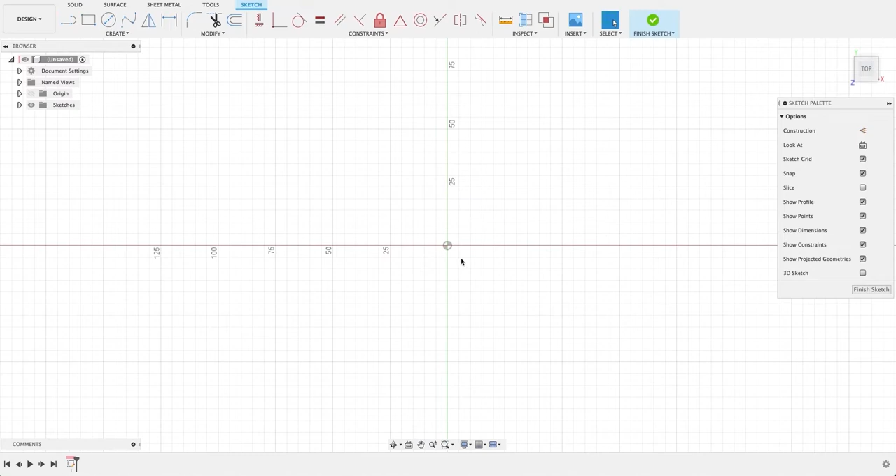To start, we're going to go to create sketch. We're going to click on our ground plane to rotate this around and start a sketch here. We're going to start with a center rectangle. We're going to go to create rectangle, center rectangle, and work around the origin points.

We're going to click in the middle there, drag out, and then type in our measurements of 123 high by 204 wide.

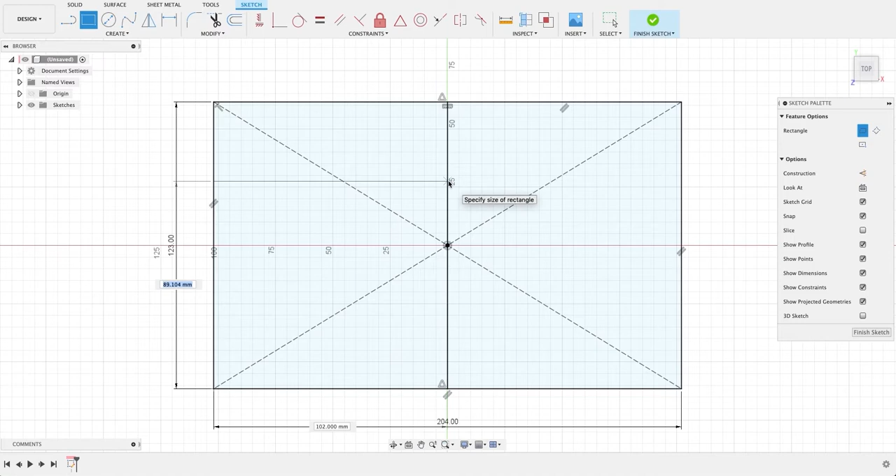And then we're going to do some more lines and rectangles to split this up. So we'll use our line tool, and lock this into the center of this top line. We get the little triangle so we know it's there, and draw down to the center point again. Then go to our 2-point rectangle, start in this bottom corner and draw up, lining it up with this edge here, and type in a measurement of 102 on the height. So this gives us our two sections.

So we're going to finish our sketch, go to extrude. Select this point and bring this up by 12.

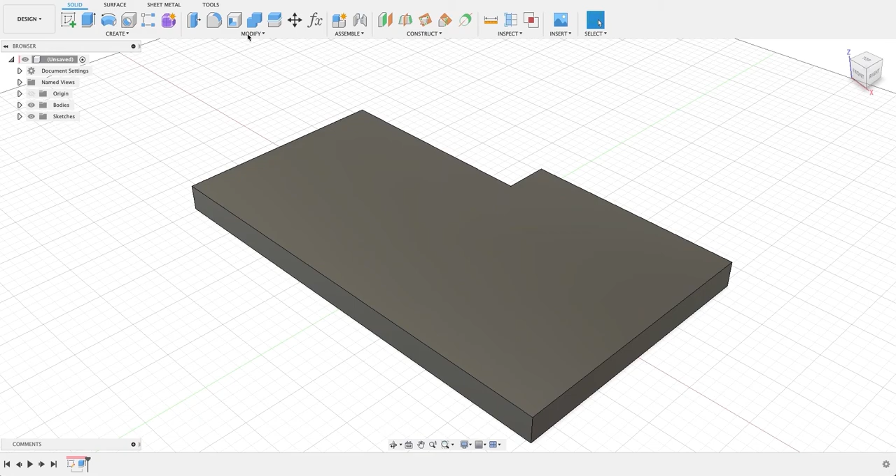And we're going to create a new sketch on top of here to start the sections. We're going to project in the geometry so we can use that. So press P on our keyboard, select this, and press OK so it brings in our geometry. And we're going to use our line tool just to split this down the middle again.

So we've got our two sections. Whilst we're in our line tool, we're going to turn on constructions, and do a construction line from this point to this point, and this point to this point—these are just here for us to reference. So we're going to turn off our construction.

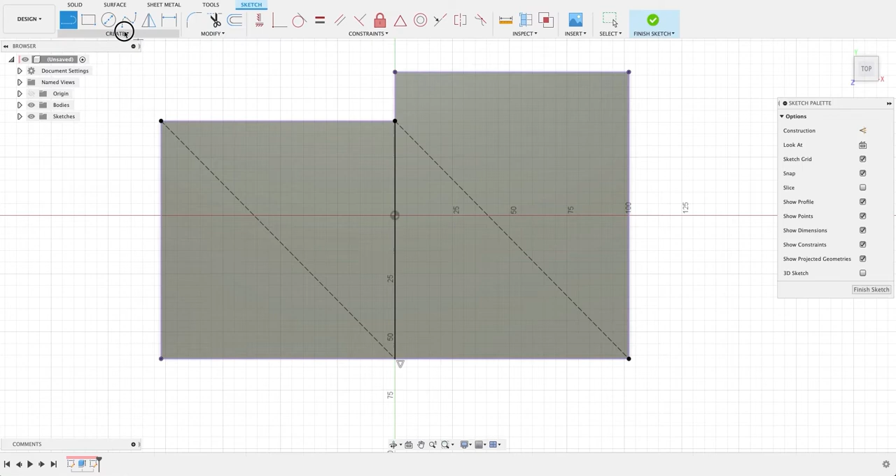From here we're going to put in our two boxes, one for the planter and one for the post-it notes. We're going to go to a center rectangle again, line it up with our center point here, click and move out, and here we're going to do 82 by 82. We'll do the same over here, on our center point, click and draw out, and do 84 by 84 just to give it a little extra space.

From here we now need to put in our holes for our pens. We're going to use our line tool, turn on a construction line, and go from this point up to our top here so we can work from that.

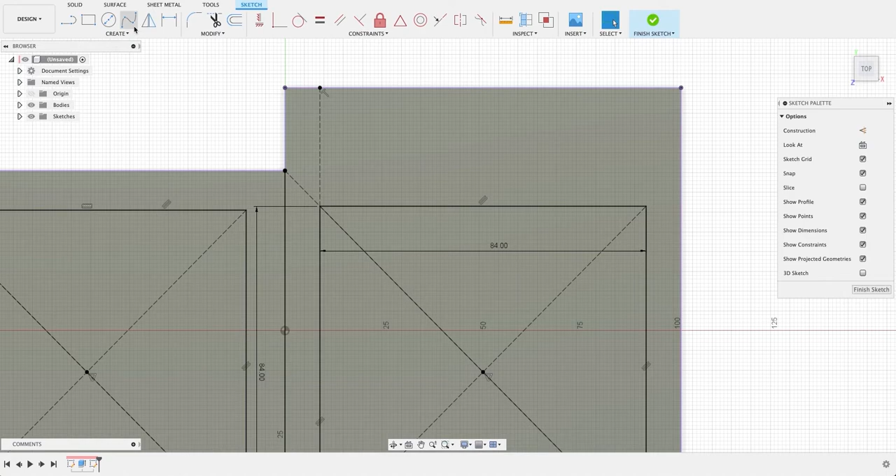We're going to turn off our constructions now, go to create circle, 2-point circle, find our center point here, click and draw out, and do this by 11mm—a good size for a pen to fit in.

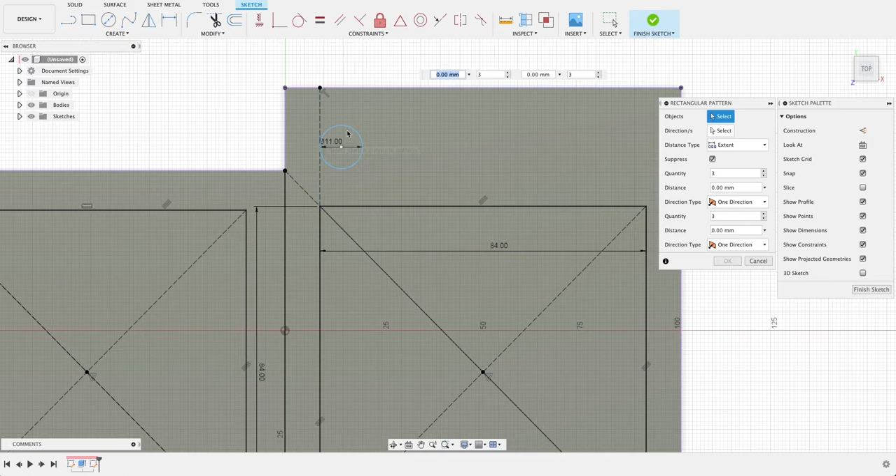So we're going to pattern this along so we can have 4 of these. We go to create, down to pattern, rectangular pattern. Select this line, grab this arrow and drag this out. We know our overall length is 84, so we can do minus 84, which is one pen hole too far, so we just want to add 11 to step that back in, and then press a quantity of 4.

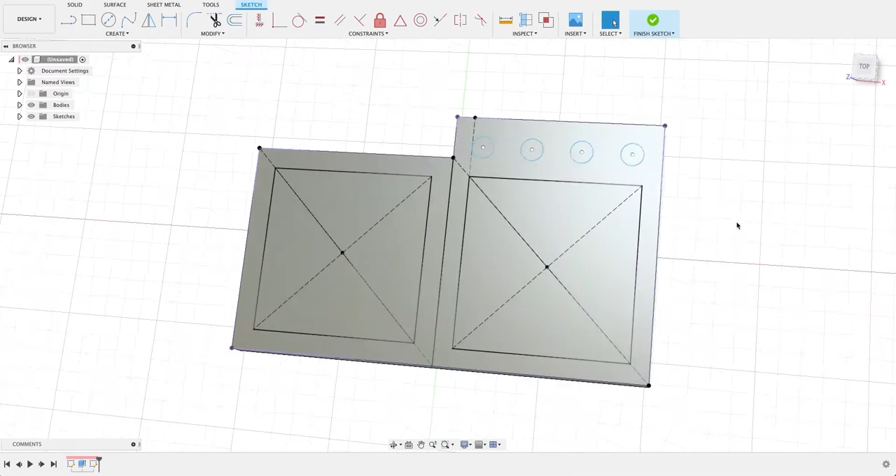Perfect. So from here, all we're going to do is finish our sketch, and extrude this down so we can have our planter sit into here. I'm going to select this and we'll do -6.

Now we're going to turn our sketch back on because I'll turn it off as it's the first time it's used. We're going to extrude this up by 12, and change the operation from join to new body. And we can turn this sketch off.

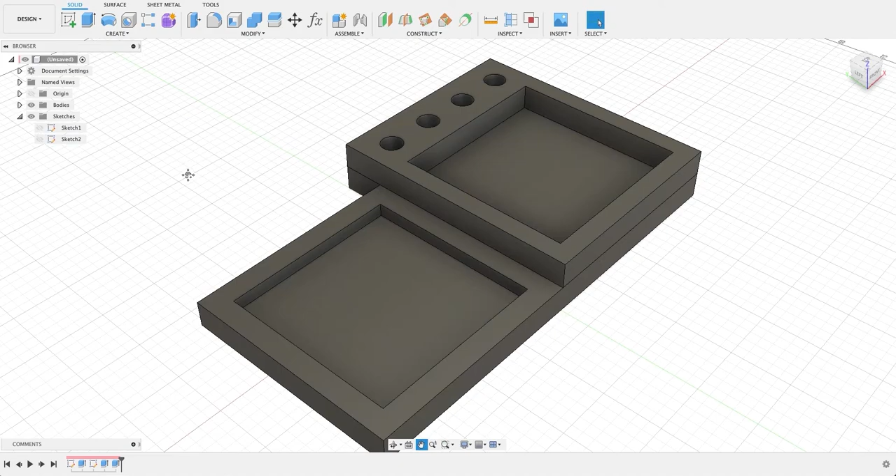We're going to bring this up again, extrude from here and bring this up to 12, and change this from join to a new body.

Okay, so all we need to do now is just go around and fillet our edges. We're going to go to fillet in modify, and we're just going to select all of our exterior edges and our internal edges as well.

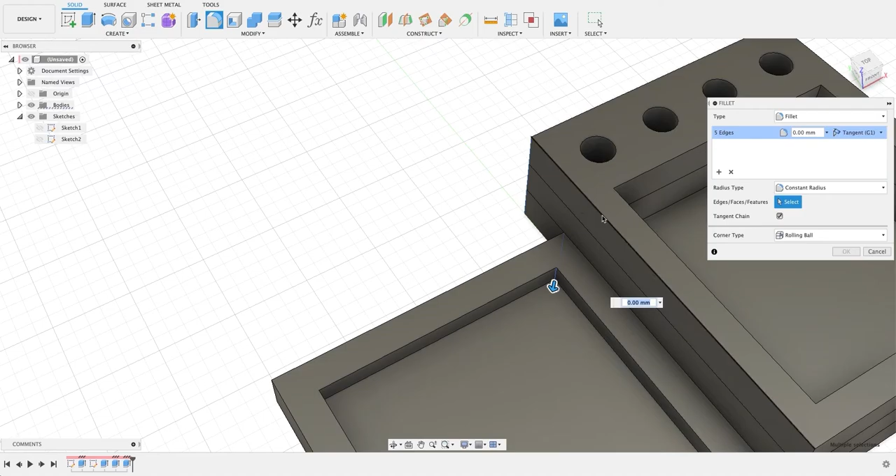Perfect, so we're going to do this by 10. Before we press OK, I just want to run around and make sure we haven't missed anything. Perfect, okay. So once this is done, we're going to quickly make our planter sit in here.

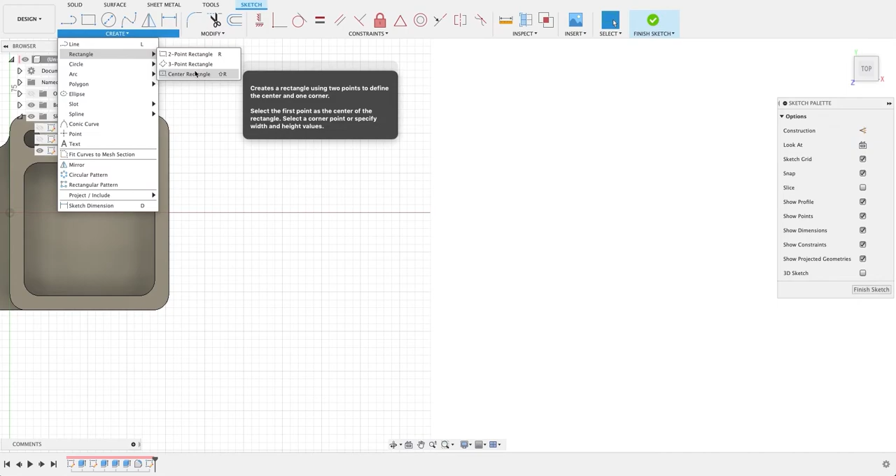We're going to make this over here, and then we'll line them up together. To do that, we're going to go to create sketch, make sure we're sketching on our ground plane, move it over there, and go to create rectangle, center rectangle. This is going to be 70 by 70, and we're going to extrude that up by 75.

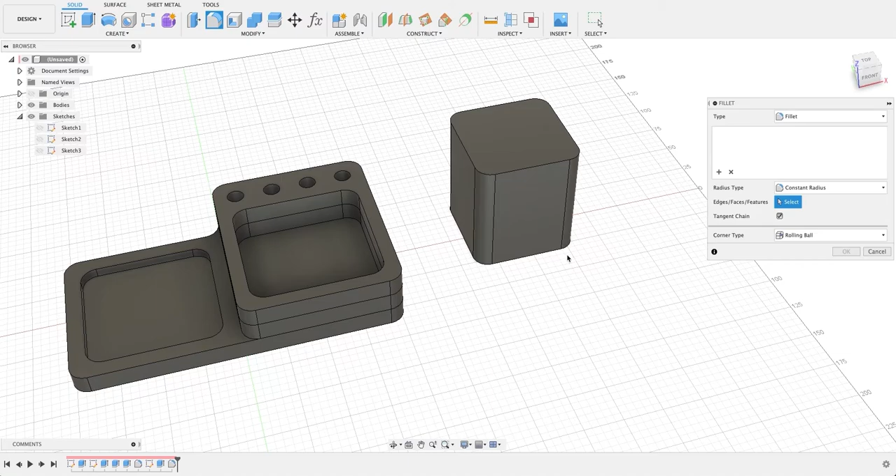I'm just going to fillet these outside edges, so we go to our fillet tool, select these, and fillet this by 10, just to round our edges around. Then we go to fillet again, select this bottom layer and do it by 5, just to make it look a bit nicer.

Then we're going to shell this, so we go to the shell option in modify, shell this by 3mm, and we're just going to round this top over. So we go to fillet, and this time instead of selecting the edge, we're going to select the face, and do this one 1.5.

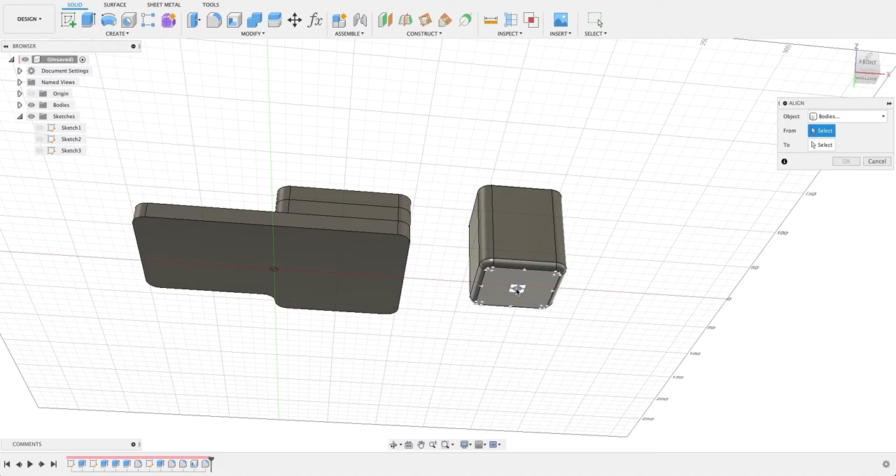There we go. So now you've got your small plant pot. We're going to go to S to bring up our shortcut menu, and go to align, and we're going to align this center point up with the center point in here.

So there is your planter done for if you're going to CNC it. You can take each one of these bodies out as DXF files to CNC. But if you're going to 3D print it or laser cut it, we'll do two different examples.

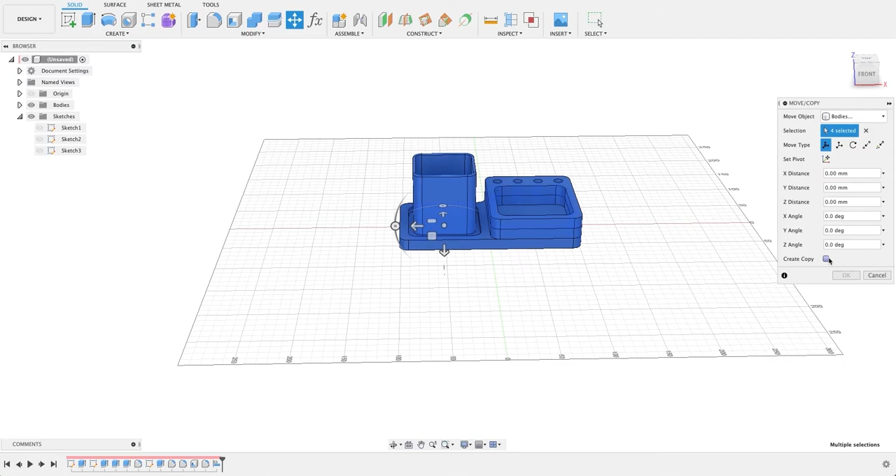So I'm going to select all of this and press M to bring up the move command. I'm going to create a copy and bring this over here. So if I was going to 3D print it, all I need to do is just combine these together.

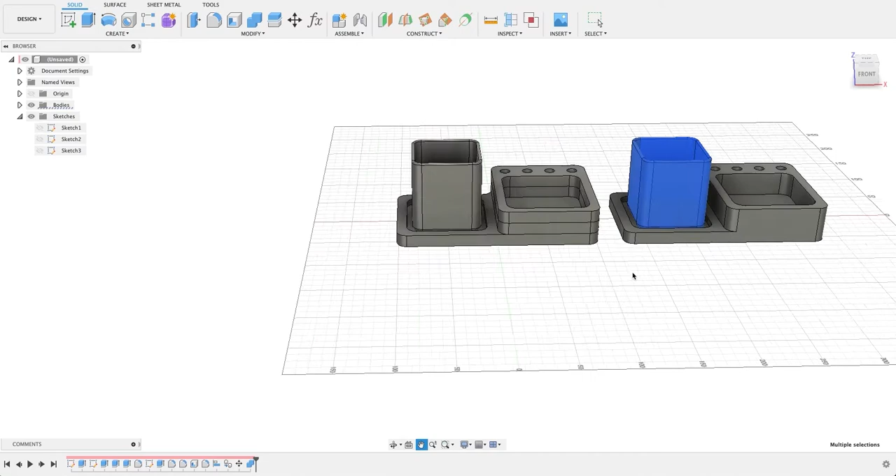So I'm going to select all of these bodies and do the S menu again and go combine, make sure it says join. Now I can take this out as an STL, and this out as an STL, to 3D print them. But if I was going to laser cut them, I'm going to make another copy over here to show you how to do that.

So we don't get confused, I'm just going to turn all these off and turn this off. The laser cutter I can get access to can cut 6mm ply, so I'm going to split these into 6mm layers. I know we cut this down by 6mm and I can confirm that here, so I can use this surface as our cutting tool.

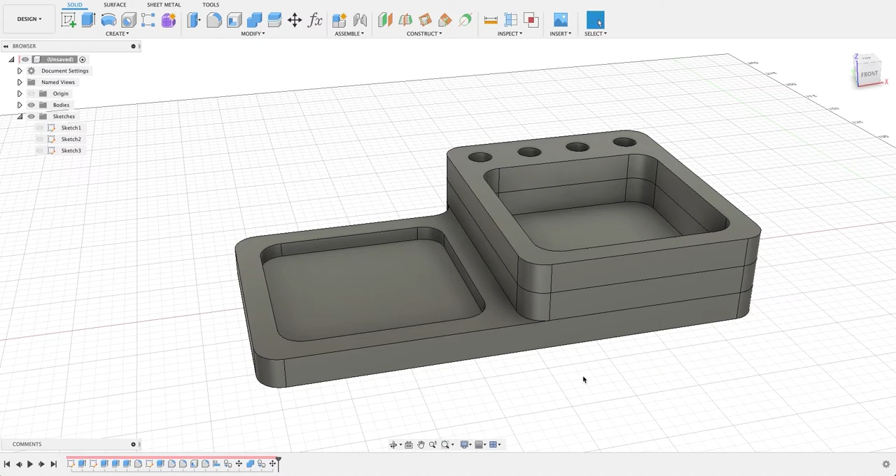I'm going to put some construction planes in between these ones to work as our cutting tool. So I'm going to go split body, select this object and select my tool as this surface, and that's going to want to split it in half through there, which is what we want. So we're going to press OK on that.

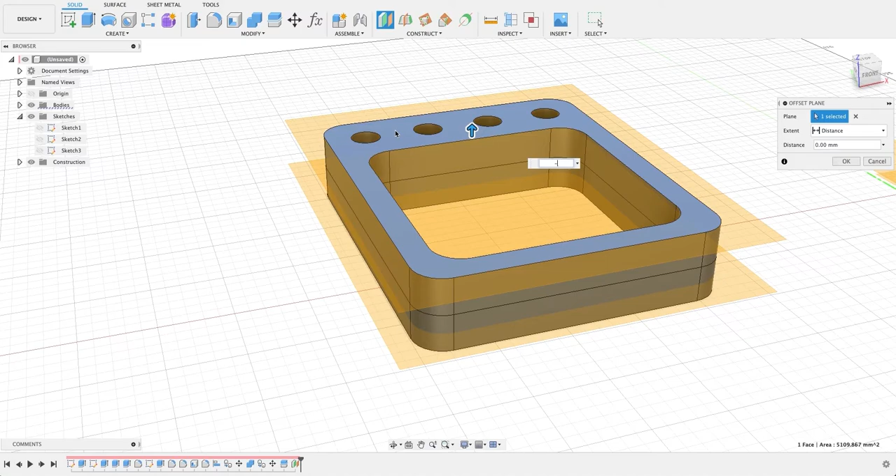So this is now two sections, and on here we're going to create some construction planes. Working from the top, we're going to go down -18. Go into being on the bottom one, and we work again from the top, go in construction plane, select the top -6 to go in between those, between our top layer there.

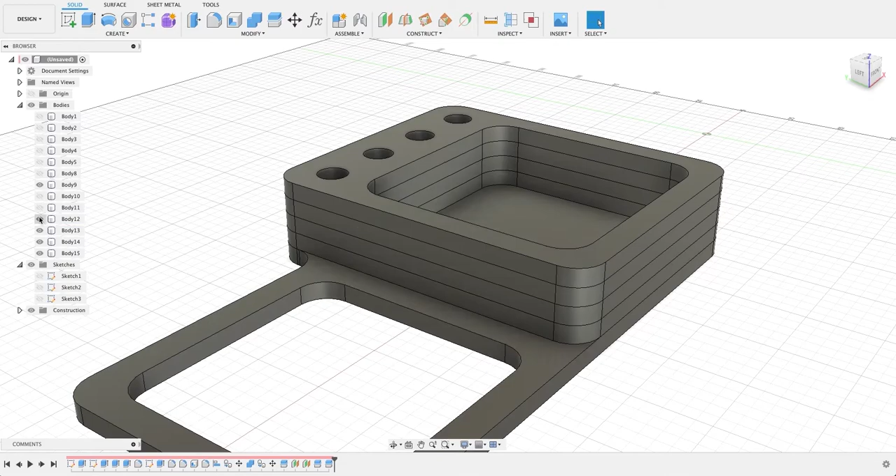So we're just going to split these again. Select that, select that, turn these off. So we've now got our 4 sections, and if we go back to our bodies and turn back on all of our layers, we've now got 6 sections we can export as DXF files to be laser cut. There we go.

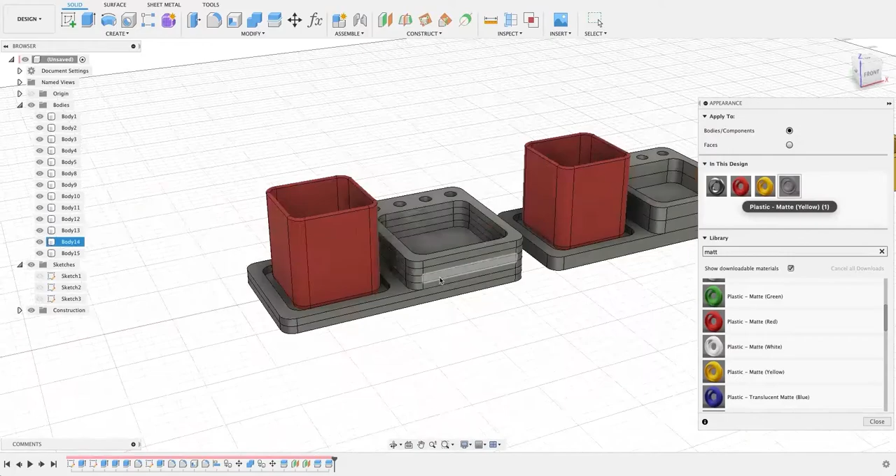So I'm going to quickly run through and throw some textures on here so we can see the differences. There you go, same planter done in 3 different styles: 3D printed, CNC, or laser cut.